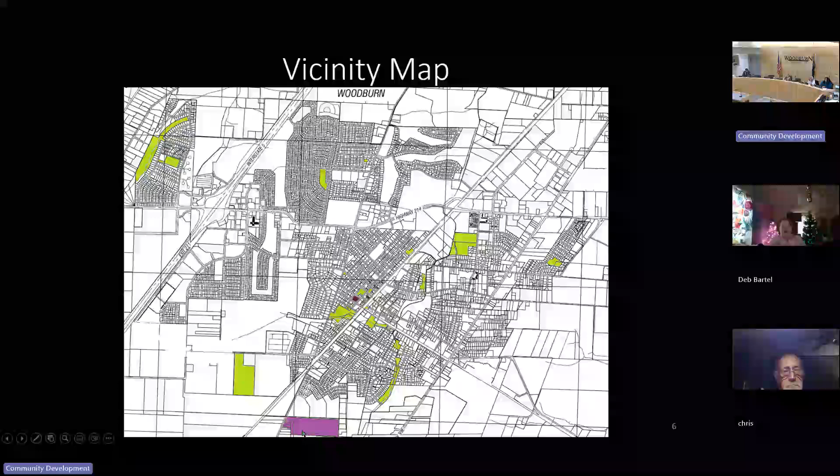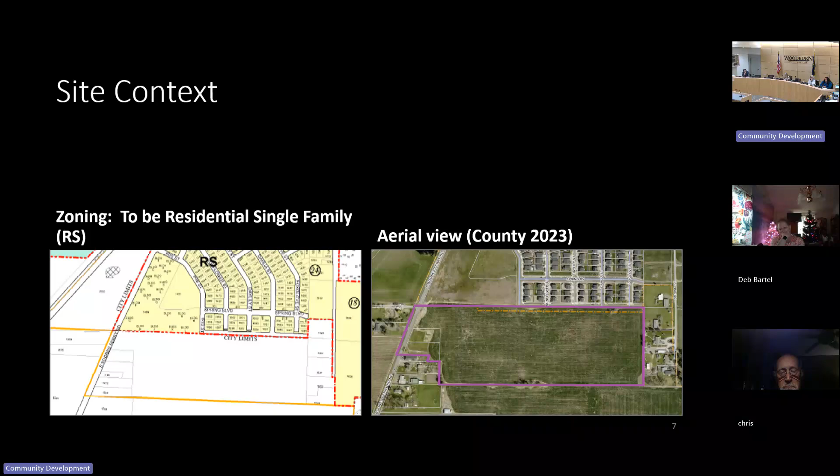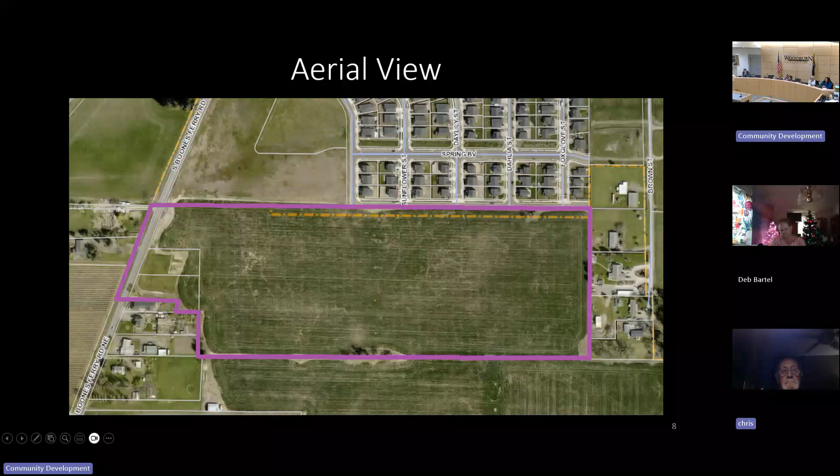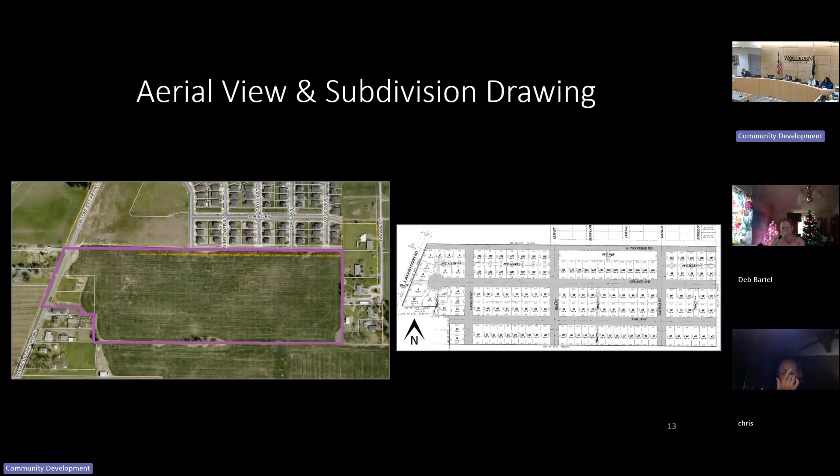As far as the development itself, the subdivision, on the left you see the aerial view, on the right compared with the preliminary subdivision plan, with the proposed rights of way within the property colored gray. As you can see, the plan is quite logical, pretty straightforward. This is a close-up showing the 130 lots, plus a few tracts for private alleys, a water quality facility or stormwater detention tract, and also a number of tracts for off-street bicycle and pedestrian paths.

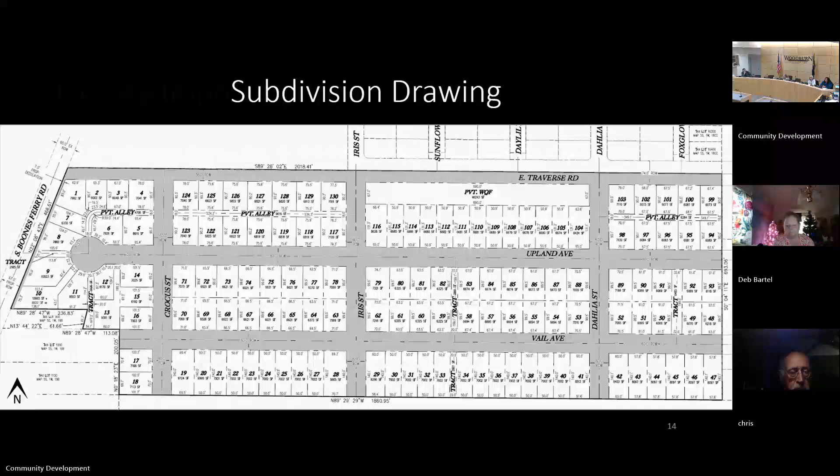Reiterating the summary from the staff report, the result from staff working with the developer is that approval and development would lead to street improvements, including street trees. There would be street stubs to allow a logical network of streets for future developments to extend from this property. There are common area improvements, particularly bicycle and pedestrian paths.

There'll be some traffic calming, some of which you've seen in other existing developments like Smith Creek, and we'll see in Marion Point subdivision, where some of the crosswalks are built as concrete amid the asphalt to help signal to drivers that there is in fact a crosswalk there.

And there's also a few trees on the site, even though it was a farm. The proposal provided enough information to show that trees qualified for removal, and for those that had to be saved, the applicant will be paying the applicable fees per the fee schedule. There were some additional trees that would have been required to be saved, but as you've all heard of the ash beetle, the ash trees are basically not of significance.

As far as the process, there's a part of the staff report called analyses and findings, which you've seen before for other projects, that compares what's proposed with what various city regulations require.

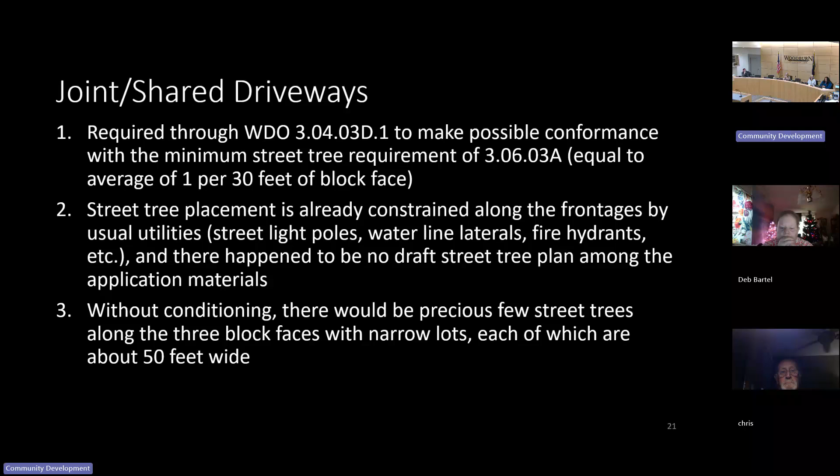I stress this because for developments generally, streets carry a lot of functions, and it's sometimes difficult to site street trees as they are because there are other needs for streetlights, cable boxes, laterals for potable water from the street to houses, things that take up room under or on the ground. So it can be very difficult to site a street tree after all that other infrastructure is accounted for. Having driveways be more constrained helps make sure that we do get street trees.

In many cases, it may not quite be as wide as this, and it may not be wide enough for a street tree, especially if there's something else already planned for there, like a light pole or a fire hydrant, or a water line under the ground.

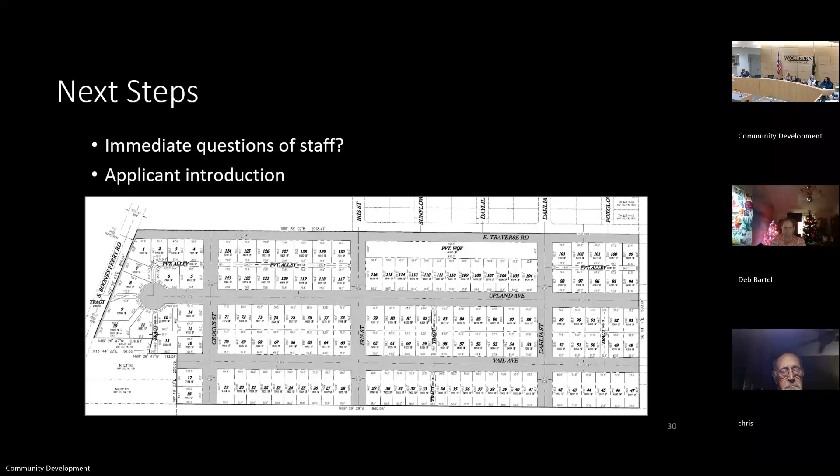Is that the plan for the entire stretch once Traverse Road gets built out?

No, I will go back to another slide to show the extent of it. So on the left image, this area here is the road, and those green bars indicate where the medians would be. The reason there's not one towards the left is there's an approval for Boones Crossing 6 to be built, and that project already has approved street improvement plans, drawings, and so staff didn't want to complicate the situation to the west because that road might be finished by another developer.

So the median is just about 1/3 of the total north frontage of the property, and it'd be 2 distinct segments. And so the opening, or the break in the median, as it were, with the turn lanes, line up with actual roads as opposed to somebody crossing the road to pull into a driveway.

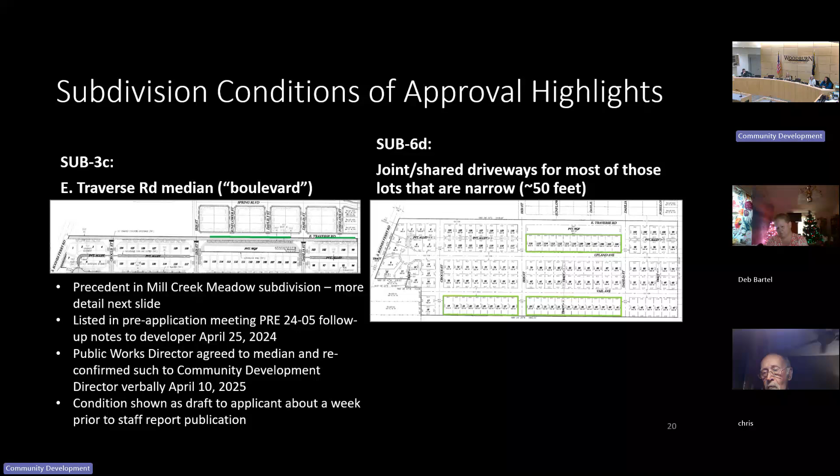Is that? Yeah, let me go ahead to another image that'll illustrate what I mean.

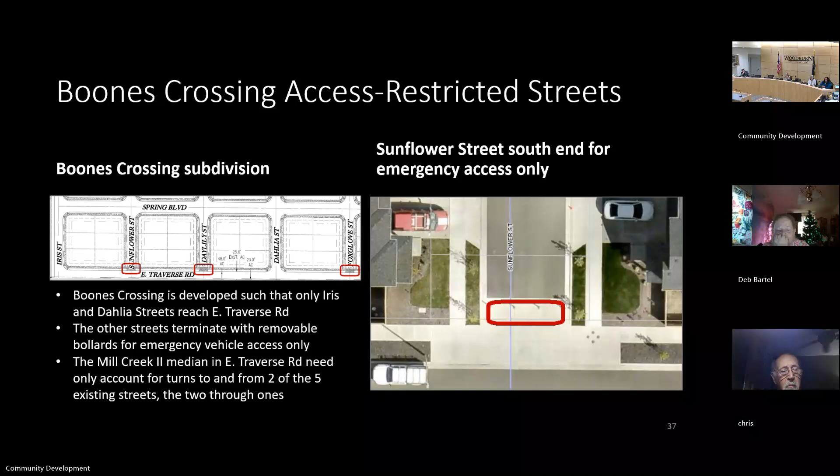Part of my question was, we all know that until new projects come in, we're unable to develop what is the full extent or plan of certain roads, especially it being a minor arterial. Are those future plans also keeping in mind to try to make it look like a boulevard, except for that one strip that's already been approved?

I think the short answer to your question would be yes, because it goes back to this drawing. And it in turn is premised on our transportation system plan, which has a diagram that indicates for existing and future streets what class they are, like whether it's a major road or something smaller and more local. And for each of those classes, there's a corresponding drawing like this one in the development ordinance.

And so based on this, and through the Public Works Department, working with things like the fire district, getting down to nitty-gritty construction details determines like the exact extent of where the turn lane is and where the median is and how they change, and other elements of the road, like the exact specifications for the curb and the concrete, that sort of stuff. Thank you.

Is all this traffic going to enter onto Settlemier, Boones Ferry into Settlemier?

Well, conceivably no, because there'd be two connections to Boones Crossing, Iris Street and Dahlia Street, as well as the connection to Boones Ferry. So at least 3 points.

Getting to the freeway or? Well, yes, in that sense that unless some people choose to go through Boones Crossing to Brown Street to Cleveland, probably most would take Settlemier, Boones Ferry.

And that probably goes without saying, you would get to Parr Road before coming up further north, if you wanted to go west coming north on Boones Ferry. The terminology might be different - I think that's what one of the commissioner's questions had to do with. This is called Traverse East, or East Traverse Road. Right, that's essentially the South Arterial that a lot of you are familiar with, planned in our TSP for at least 30 years to essentially be the Southern Beltway loop. This is the big connection, the arterial trying to move as much traffic east to west without coming through the rest of the city. That's been a big part of our TSP for years.

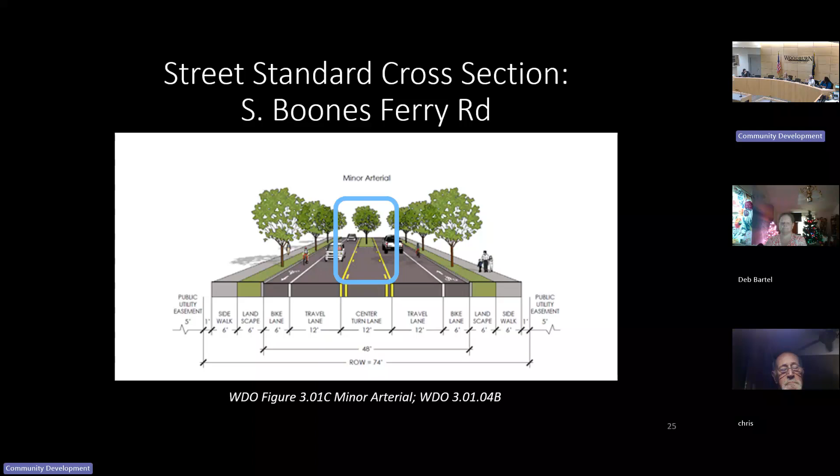Do the commissioners online have any questions for staff? Not at this time. Yeah, I don't either this time. Thank you, okay thank you.

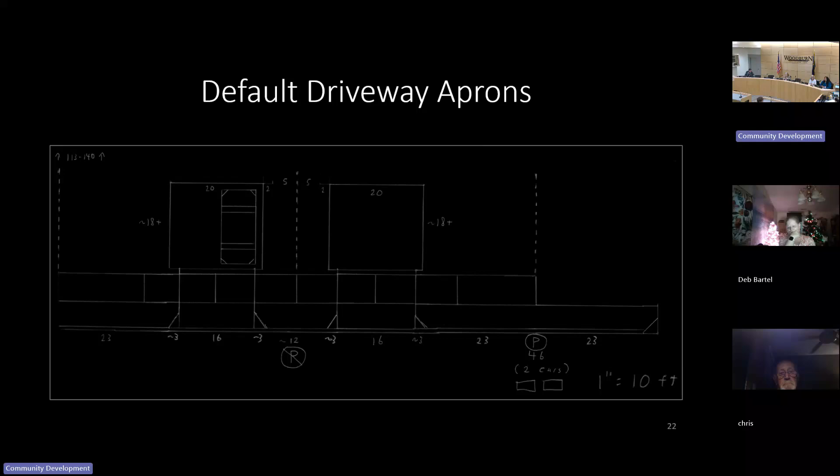So it would be tandem parking. Is each garage two cars or one car? We don't know, staff and we don't need to know for the subdivision. As you know from state law, the dwellings could be houses, duplexes, triplexes, or townhouses. So the image on the screen assumes detached houses just for sake of simplicity, so it also assumes two-car garages, like a 20-foot wide swath of pavement on the private property side.

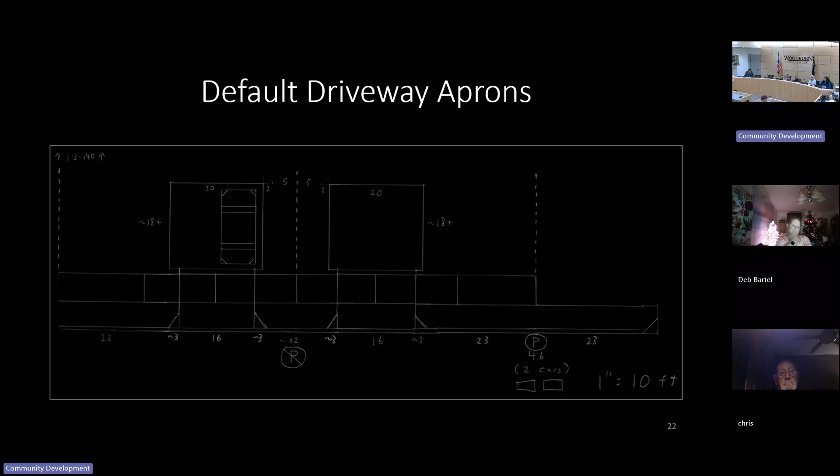It shows the typical condition where each lot has its own driveway, and you'll notice that between driveways there's probably not room for a street tree in most cases, and no room to park. Whereas compared with the shared driveway image, you'll see on the right side that there's more distance between driveways that are fused together, so you might be able to fit an extra vehicle on the street for public parking. It doesn't change the private parking, but it helps with public parking.

Applicant stated that there's a decrease in value. Do you have any data on that? Harlan, do we have any? Okay.

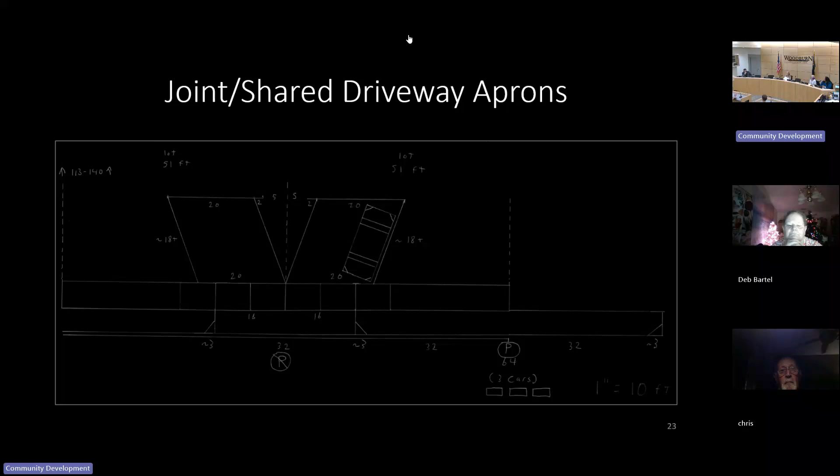If I could just add one more thing about the median. The utility conflicts we talked about that are different than at Mill Creek Meadows have to do with manholes for sewer that are already there. The median would go over where those manholes are, and you can't jog around it. So if the medians were to be there, those manhole structures would have to be raised up so that you could access them.

They would be over the line, so if it ever needed to be maintained, the median and whatever trees had grown in it would have to be removed to work on that line. The lines are already there. So that's the real difference, as Garrett mentioned, between Mill Creek Meadows and Mill Creek 2 - these are already here, and when we designed Mill Creek Meadows, we didn't do that. We offset it from what's normal code and required in terms of location.

Even with regard to both the median, if you start shortening up the median to allow for the turning, you're not going to get a whole lot more trees in there. And because the shared driveways are limited to a few lots, the number of additional trees you'd get out of it are not that great. We'd be willing to come up with a way of calculating what that would be and plant those additional trees in other places, in yards and things. So we just think both of those conditions should not be included in the approval. Thank you.

Just a reminder, what you're providing is a recommendation. That's how it will be carried forward to the city council, along with everything else that happened here - the record, the testimony, everything. That's important for their consideration. I say that because usually you're making a final decision on quasi-judicial matters where every preposition is critically important. This is a recommendation, so it may be massaged and smoothed over by the city council.

So I would change that to say 'recommend' - motion to recommend approval of ANX 2402 as conditioned based on the analysis and findings in the staff report, except that staff are directed to... except and then say, yeah, staff are directed to.

The first bullet point will say remove Public Works condition ANX A22. And then the next one will be ANX... remove condition sub-6D. There should be an ANX before that A22.

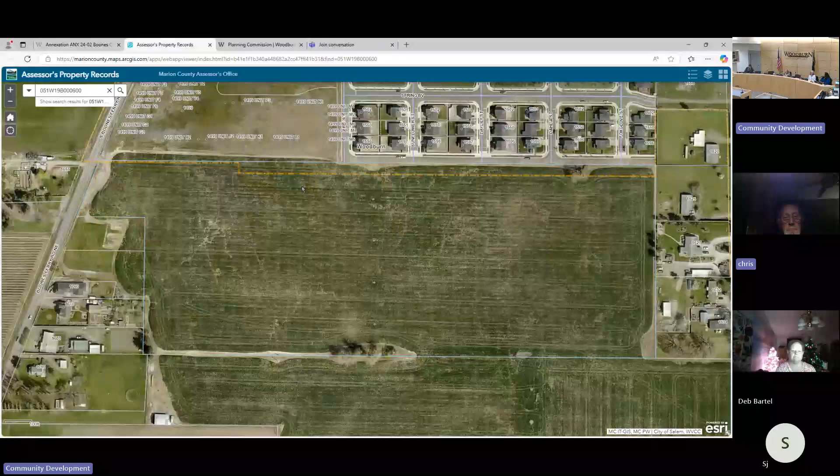I think there's a couple of things, and I could do this super fast. Would you mind pulling up an aerial? There's one spot I think of where I get a lot of comments - Kirksey and Parr, which is an example. There's a lot of school children, a lot of school traffic comes out, and because there's an apartment building there, we get a lot of traffic from Kirksey and North South Road coming in. So, of course, our real influence is over the WDO and the zoning code, which is why I mentioned it. That's the one I'm thinking of. There aren't cars there right now, but typically on that northbound Kirksey, you can kind of put your finger on it.

I am not intimately familiar with how far back you need to be from, say, a stop bar there, where we would prohibit parking or the kind of things we do. I don't know of anything in our WDO that we would touch on.

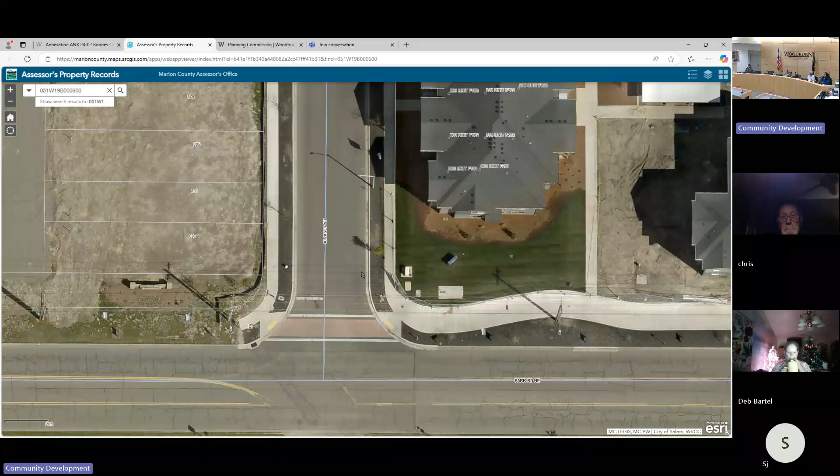We do bulb outs a lot. Why don't you carve over to the ones going in on Stacy? I don't know if they're on that map right there. Stacy Allison put in as an example.

So some of the things we do, and I say some of these we just advocate for, might not be in the code, but we're happy to go in and spend more time calling them out. Let me show you a different example.

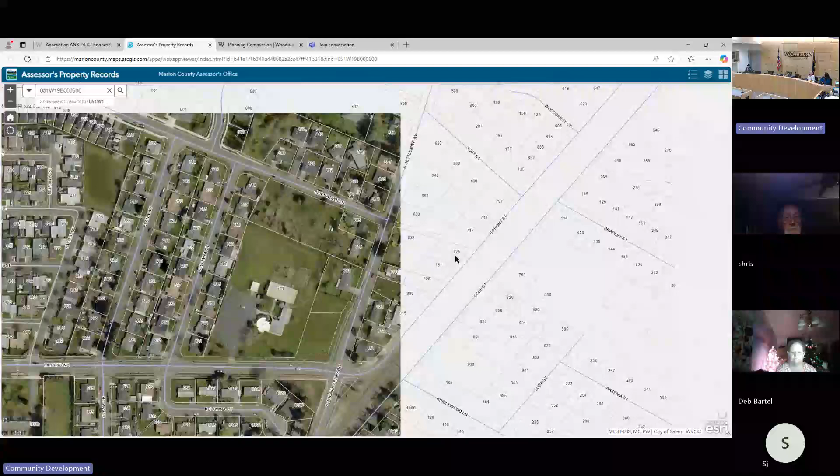I think there's one right next to City Hall. That's where I'm... yeah, downtown definitely has them. The downtown has them. Oh, right. Downtown, we've got them everywhere.

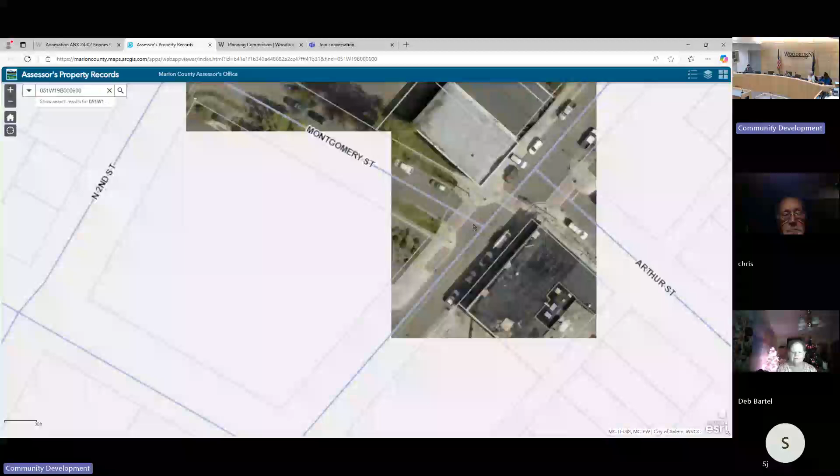Do you know the reason we were able to do it? Because those are our streets downtown, and we redid them. We probably redid them 6 years ago.

I got to tell you, that was extremely contentious because we heard from, you were here, we had a lot of people who said don't you dare do it because it's going to make it impossible for any trucks to make turns.

So like every other transportation issue, there's always this conflict between big trucks, fire trucks, as you heard earlier this evening, and pedestrians. It's the need to move traffic fast around turns and the need to slow it down so people can get through there safely.

Those bulb outs, big picture, I'd say staff advocates for them often. Our public works department's gotten a lot better. When I started here, it was, you couldn't even dream.

They were anti-landscaping and medians when I started here, right? Because they thought trees would hit them or cars would hit them and they don't want to maintain them. So this is an evolution. It's a hard thing to do.

But these are important, I think those are really appreciated. I think it makes you slow down a lot when you go downtown. We put these in a few projects. There's some of these in Smith.

I know we have them out at Stacy where they stick out, where we have a crosswalk, these bulb outs that we call them. Yeah.

I'm not sure how to go into the WDO and add more, but I'm happy to inquire more about what the standards are and what we can do for some of these separations.

I mean, even for a start, any place that is like a certain distance or path to, whether it's like a park or something, where you have especially children, I think it's maybe easier to advocate. And again, considering what we heard today, that it's not left in this funky language that may seem a little ambiguous, but trying to direct it a little bit more.